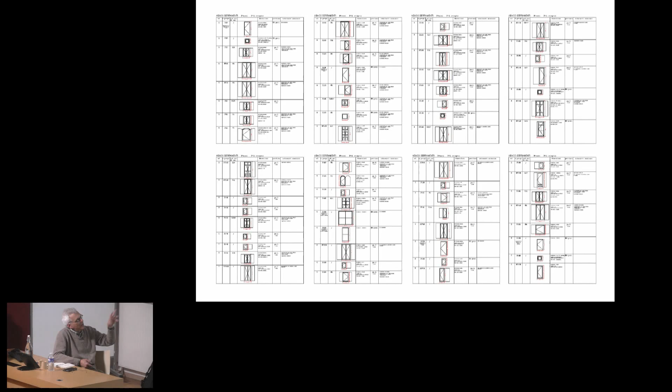This is a part of the catalog that we were collecting without having a proper structure of collection of materials. It was something we always did in a very wild way.

The other material that is in some way a discarded material, a leftover, is the straw — a secondary product, a byproduct of cereal growth, of the crop.

This is the moment of putting in place the structure of the straw bales. This is a section of how this building system is organized.

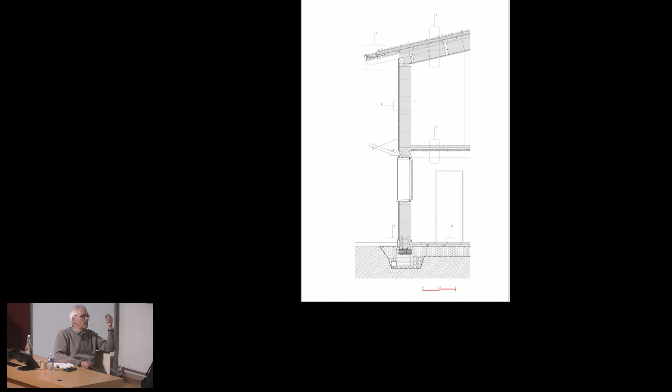In this case, for trying to save some money for the client, it was an experiment to leave the board, the plank of larch, as it was at the site. Normally you see this kind of oblique wooden planks in the rough phase of construction, and then there is a final layer of the facade. This inclination of the planks also has a structural purpose, because it's for bracing the prefabricated component.

Two of the buildings have an arrangement and section that comes straight from a thermal origin. This one is the house of the owners.

It's built with this hot nucleus, built in fireproof brick material, as a kind of central core. Then there is the external wall, made with timber structure and straw, and then the pitch of the roof, which is also treated with grass — you can see it here. This is the nucleus, the hot nucleus.

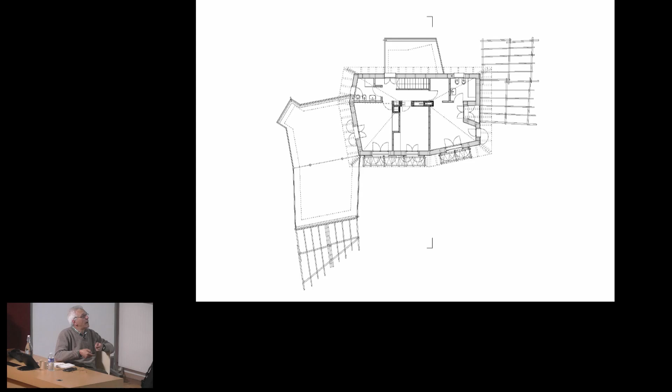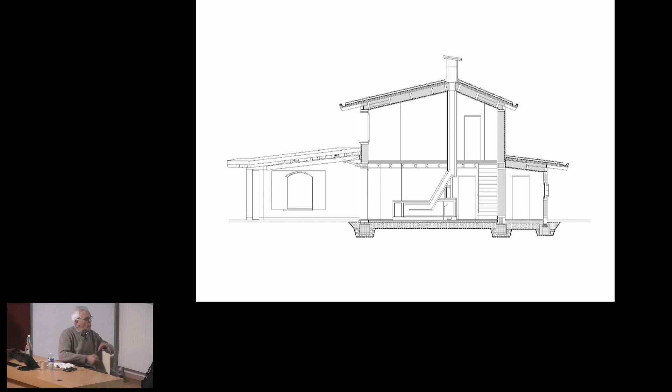In fact, there are actually two nuclei in this house, because there are two stoves with the recycling of the smoke, which goes and bends many times to keep all the hot part of the vapor of the smoke. The smoke goes out at the end almost cold, and all the warmth is given to the internal space.

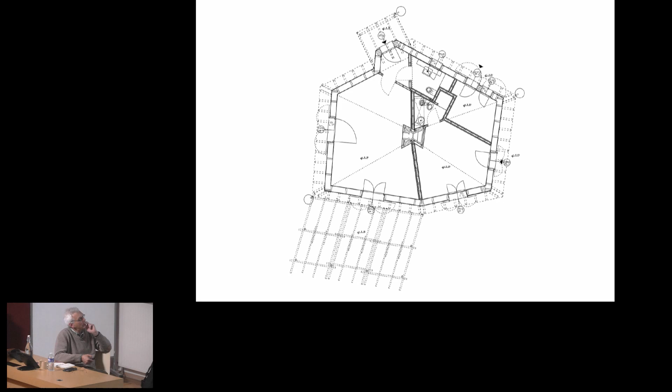This building, which is completely different, is the little building of the riding center, but it has the same thermal section: central hot core, external straw perimeter, and the roof. This is the plan with the core, and this is the section that you can see even more clearly.

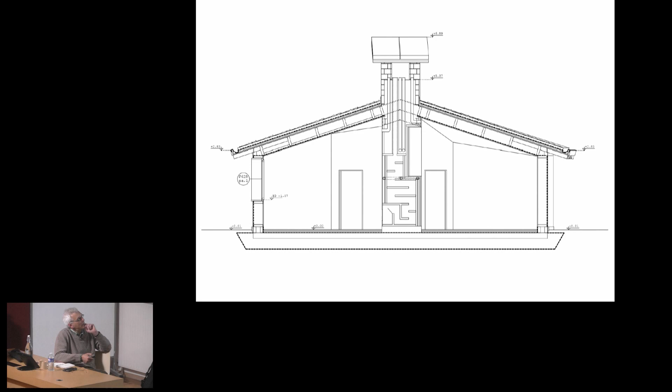In this case, there is also an interaction with the hot air and the solar water panel, so the hot air collaborates to warm the water in the solar panel.

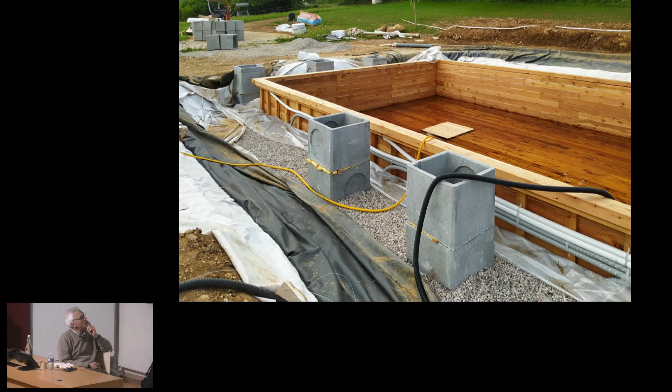And there is also this natural swimming pool that consists of a kind of large box made in larch wood, like a sunk boat that is completely underwater, and divides the part of the pool where people stay from the part that is regenerating the water through the plants.

Another project, much smaller, with some similar ingredients to the previous one, is also on another lake in the north of Italy, this time Lake Maggiore. This little house, made also in timber and straw bales, is actually a substitution for a very beautiful house that we initially tried to restore, but in the end it was too damaged and too expensive to keep.

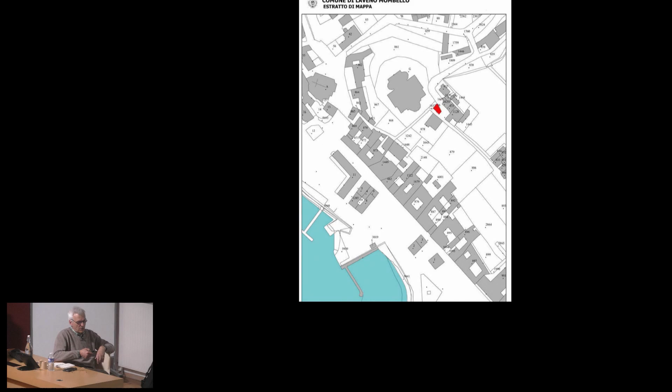This is the lake, in the middle of this village called Laveno on the east shore, raised up with a nice view of the lake. This was the old house.

This house was cut in two parts. One was completely squeezed and close to the existing villa, and the other was exposed to the sun and to the view of the lake. From this part, this is the beautiful view.

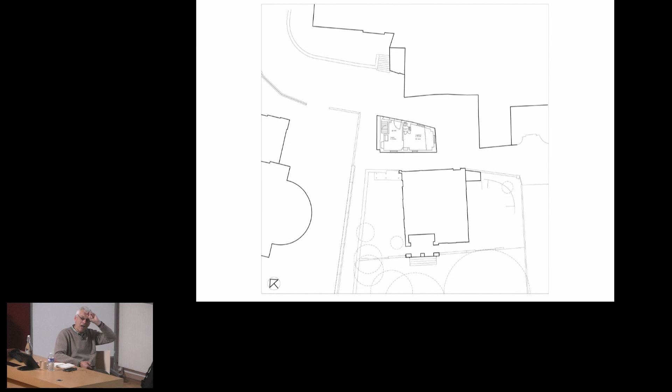The project had to obey a strange regulation that authorized building a new volume, but respecting absolutely strictly the dimensions and measures of the existing one. So this is the plan, inserted in this particular urban situation - it's like the little house was parked in the middle of a little square.

And this is the house, also with a large wood structure. This time the structure was left exposed at site and the facade was plastered, leaving the structure visible.

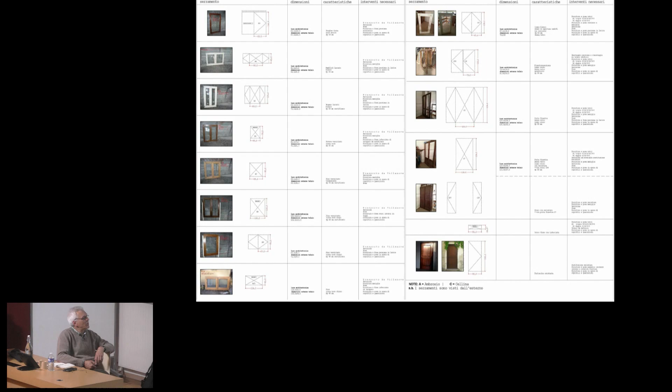Also here, this practice of collecting window frames around the north of Italy, and in this case, there is also the recovery of as much as we could - roof tiles from the old little building, steps, stone steps, parapets, and other pieces coming from outside, like this gate and others.

The original project wanted to reuse all these hexagonal tiles that were paving the first floor of the old house. So the project had this part with these tiles that we were using for protecting this side, which in the old house hadn't a jutting roof, so we had to rebuild it as it was, with this roof without any cantilevering elements.

So it wasn't protected, and for a building in straw bales, this could not be good. So we thought to reuse these tiles to protect this side, but it was rejected by local authorities. So we changed it a second time, again with the same tiles, but with another pattern that was copied from an existing house on the other side of the lake. That second time, it was approved.

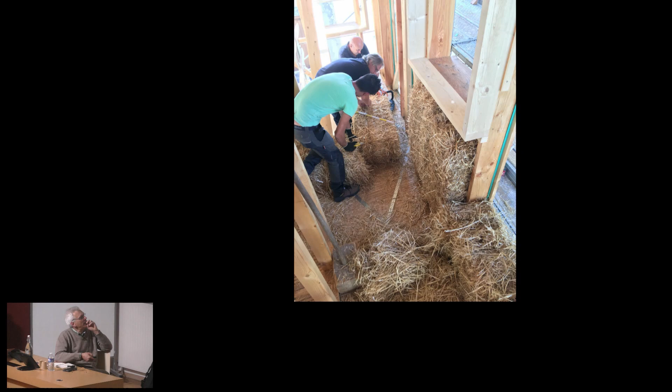The moment of teaching the constructors how to fill the structure with straw bales. The structure has been designed bespoke for the dimensions of the straw bales, of course.

The north side of the house, facing this micro square, and this section of the new house in some way reproduces this division in two parts.

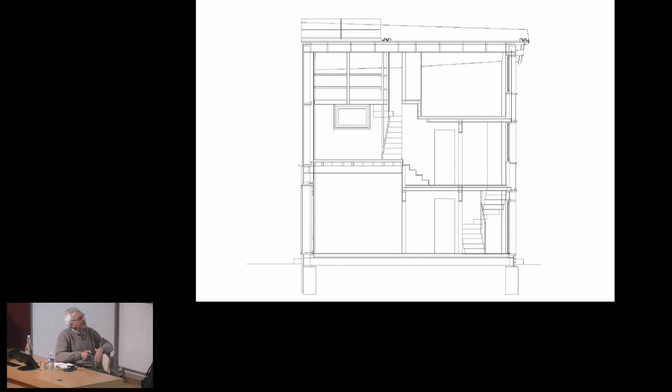The one that sees the lake and the sun, where there are the living spaces with the mezzanine here, and the other where there are the staircase and the two bathrooms that, by Italian regulation, can be shorter, so we could arrange another little room on top.

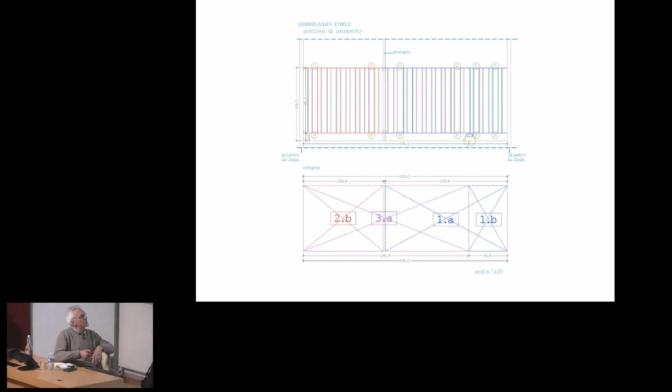The part of the house that looks at the lake reuses the parapets of the old house, and there is another trick here, because there was an objection that the old parapets were not guaranteeing the present regulation, that you don't have more than 10 centimeters between two elements. Since we had plenty of this parapet material, because the new balcony is shorter than the old one, we put the parapets in 2 layers to reduce the space between the vertical elements.

Unfortunately, at the end there was a kind of rebellion of the builder allied with the owners, and they didn't want to put on the hexagonal tiles. They said they were dispersed, they couldn't find any more of them in the warehouse of the builders.

So at the end, no hexagonal tiles. We were accustomed to having some figurative elements on the facades, so that was substituted by this kind of little graffiti that we made on tiles. These tiles also came from the warehouse of the builders, not clear from which other building, but we made some of this graffiti on some tiles, and they are almost invisible.

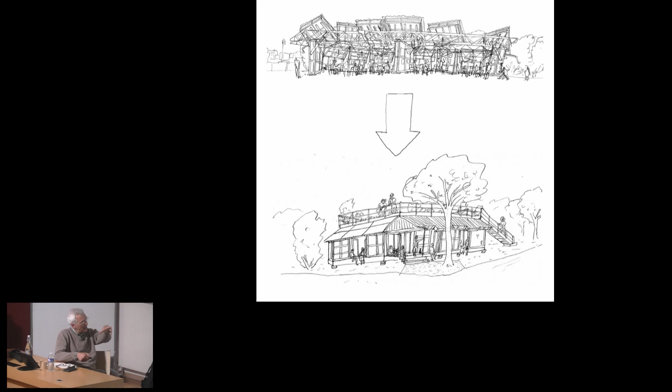Then we adapted the design of this final purpose into a mid-term solution for the pavilion for the exhibition, made again almost completely with the same family of crates. The only part prepared bespoke for the final version are these trusses.

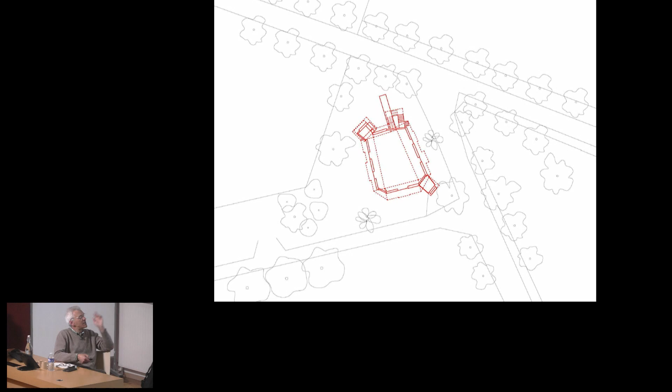This is the final pavilion, very simple, with a kind of open-air class on top. And this is the installation at the Triennale, where you see that the crates are used at the same time for both vertical structures and for part of the roof.

The structure was meant to provide some shade in a place where there isn't much shade, and some place to stay and rest, with a lot of benches. As the exhibition was in the hot season, together with the shade there were also many fans on the pitch of the roof.

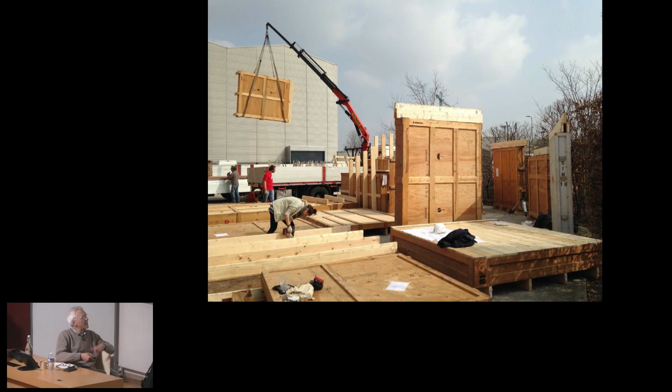The crates coming from Lake Maggiore, the preparation of all the elements, and the construction on site. This is the porch, where the crates have been consolidated with other elements to become bearing structural elements, but are empty. In the second version, they should be filled with straw and completed with membrane and other elements. As you see, the trusses here are used in a somewhat improper way.

And the pavilion has been used for different occasions, like presentation of books, or simply for people that stroll around this place. It's free, has a free entrance, and so is frequented by families and people until midnight.

The covering crates of the roof were coming from another dismantling in another work site in Piedmont that we were refurbishing, and is fiber cement without asbestos. There is also a little acrobatic collection of rainwater, not for collecting properly, but only for bringing it to a safe place without it going on the people visiting.

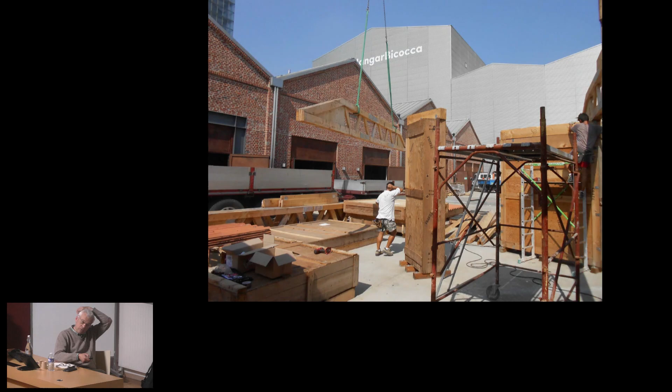The dismantling of this construction, and after a series of failures, this pavilion that I showed wasn't built. After some years, with the difficulty of keeping all the material stored in a place in Milan, the last occasion was to build a building here that should, at its time, recover and transform some existing building built without permission many years ago. This should be a place for association, but it was a building made for the municipality, so public property.

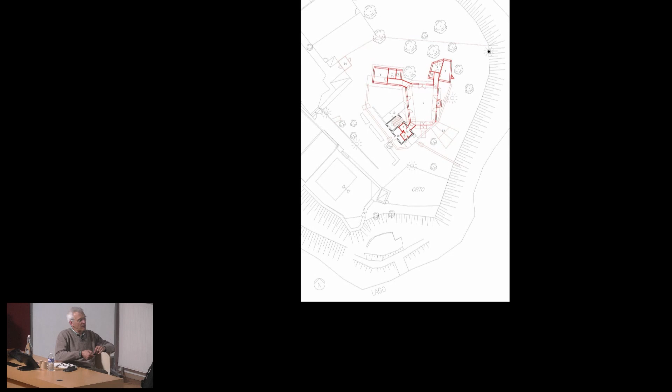And this is the main pavilion that was completely redesigned with the same materials. This is a piece that survived from the existing illegal construction, transformed into public bathrooms and a kitchen, and the other two constructions, like a kitchen and a little space for offices. This is the part that was kept of the existing building. And these are some sketches of the project.

It was put in a particularly beautiful place between two lakes in a park in Milan, where there were these caves for the digging of the gravel. This is how it is now and how it should be, with the two lakes visible from the top of this kind of terrace on top of the building, one and the other.

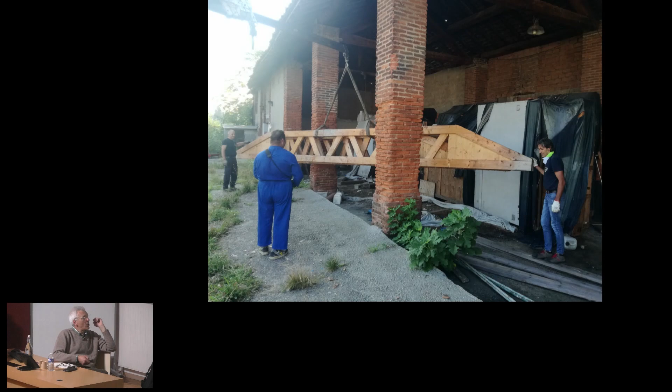This project has a sad story because the first time it passed through a very troublesome bureaucratic path, and there were 22 permissions to be collected. The main one, the office of the municipality that should then manage the building, their first statement was particularly enthusiastic, saying at the end that the project practices the famous circular economy and all this. So we moved all the materials from a farm south of Milan to the place where the building should be built, but then arrived an addendum to the same statement saying, perfect, we confirm the previous statement, so the project is approved, but with an addendum, which is simply that the building should be built only with new materials.

So, at the end, the materials have been there for 4 or 5 years, which was during COVID, and are rotting. The part that is surviving of the famous family of crates intersects in some way with this other project.

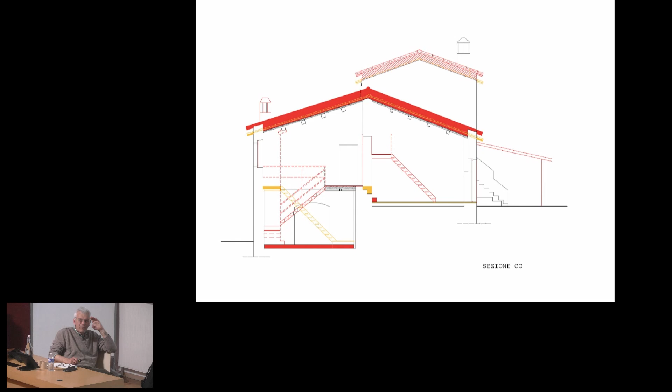That is a project about this casale, this rural house in the hills of Lazio, east of Rome, and is a complex of buildings that was in this condition 3 years ago. Very beautiful, and the operation that was needed consisted mainly in two categories. One was to insulate the roof that was already insulated with 10 centimeters of polystyrene, a very horrible material, very used in the building market, but very bad for insulation against hot climate.

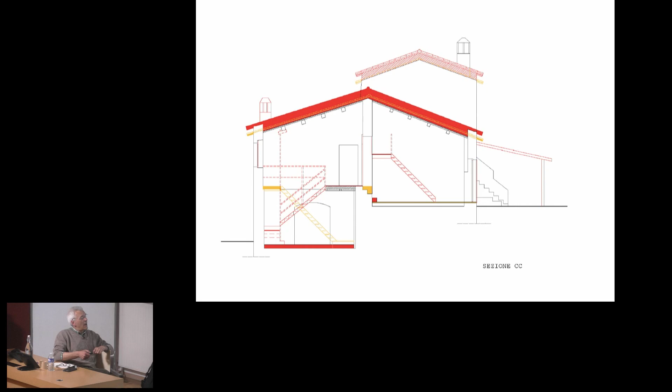So the project was to take off the polystyrene from the roof and use it for the contact with the floor, with the ground. This one operation produced this, and was also the occasion for consolidating, doing the anti-seismic implementation of the existing structure. So this is the new insulation in straw bale and the new beams that work together with the existing beams underneath.

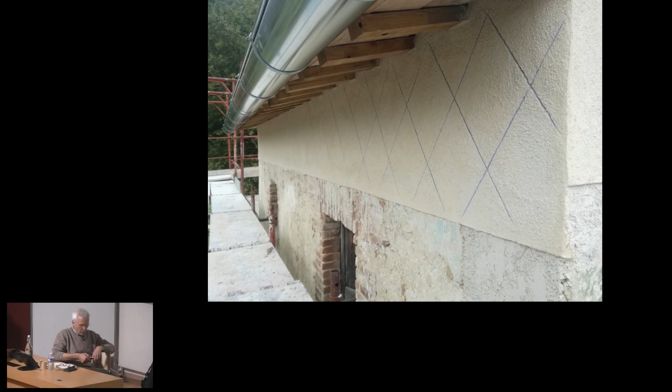And this operation produced a series of stripes in plaster that were more or less the parts that were damaged of the old plaster, or the parts that were produced by this elevation of the thickness of the roof, of the insulation. And so there is this try to embellish this new part of plaster, of lime plaster, with some graffiti that also here are almost invisible.

For example, there are graffiti here and here. Perhaps you see some circles here, but you must wait the right moment of the day to see them for some short time. For example, this kind of net pattern, or this other one.

And the second operation that was needed there was simply the construction of internal walls, because the house was probably left during a try of refurbishment many years before, in which they demolished any internal wall.

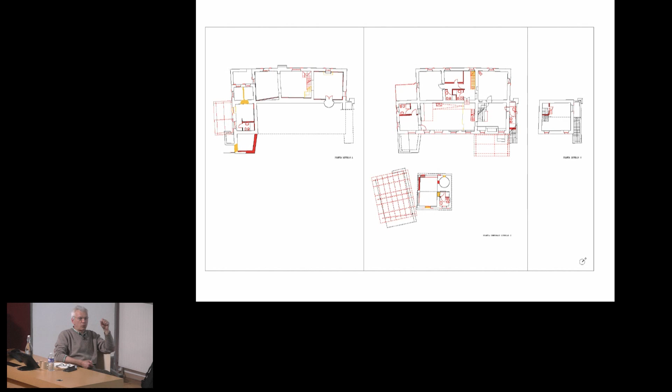So it's here that the leftovers of the family of crates come back again to us, because we needed to empty this last garage where they were stored. And so we proposed to these friends, the owners of these houses, to use all these elements to do the internal walls, doing a kind of series of collage. You see here all the walls that were produced by these given elements.

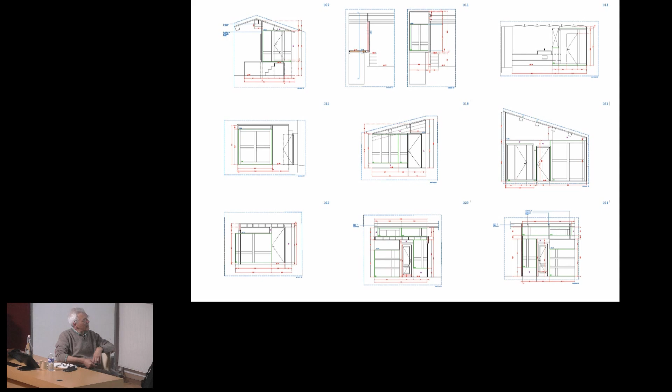The elements were filled with wood fiber and with a membrane, and are mainly, at the end, toilets. This is the internal side of the toilets. This is another one. This is another one built, suspended, but built on top of this existing parapet of this existing staircase.

And this is a system of walls that creates two bathrooms, a mezzanine, and a small room, a corridor.

And with the leftovers of the leftovers of the leftovers, of course I'm referring to these frames that were inside the crates to brace the canvas of the artworks.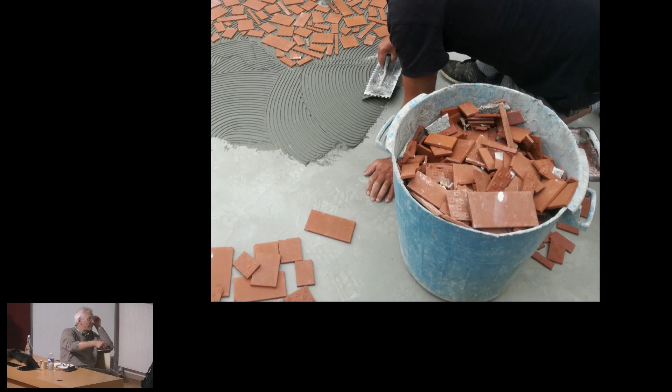Other salvaged things are leftovers - this flooring of the terraces is made with the leftovers of the internal floors, very rough tiles that have been used for doing these terraces. This was the structure part of this group of houses, a shed that was demolished by the constructor the first day.

So we did an exercise of reconstruction with the same elements for rebuilding a shed for the photovoltaic panels, where the old elements have been coupled for getting the resistance that was needed by the engineer.

The last two things I want to show you - this is not a project of ours, but made by my students in Mendrisio. I teach at the Academy of Architecture in Mendrisio in Switzerland. This is the work we made in the last two semesters, last year and the previous year.

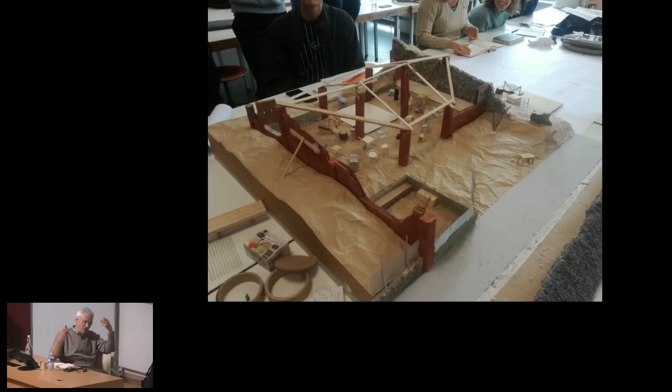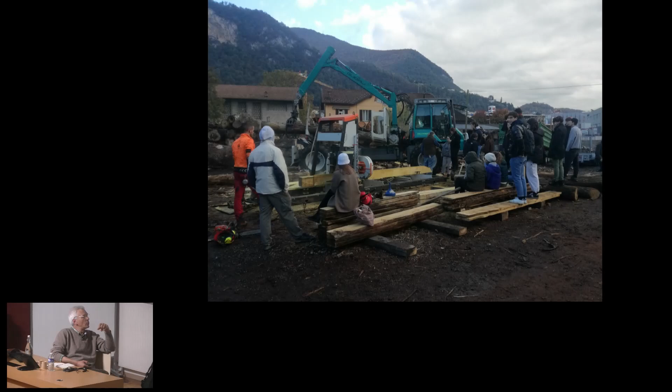The difficulty was doing the master plan, the general project all together in 2025, but this was the first semester. The idea was to construct this big tent, like a circus one, with many structural elements cut from local wood coming from the management of the forests.

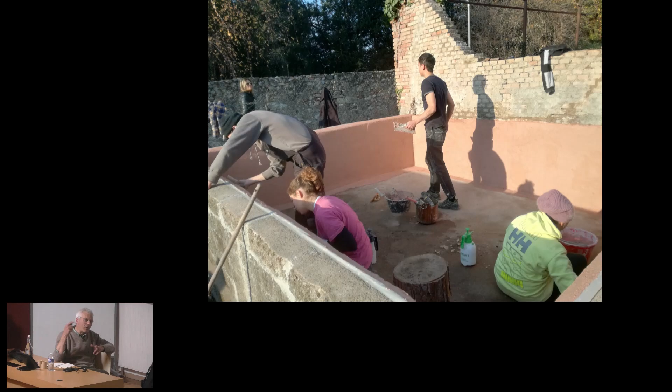Discarded sails from the lake near Lake Como, discarded materials and leftovers from marble cellars, and fragments of roof tiles - the old roof tiles that were there from the rural use - we have broken all the fragments into a very fine powder mixed with the grassello of lime.

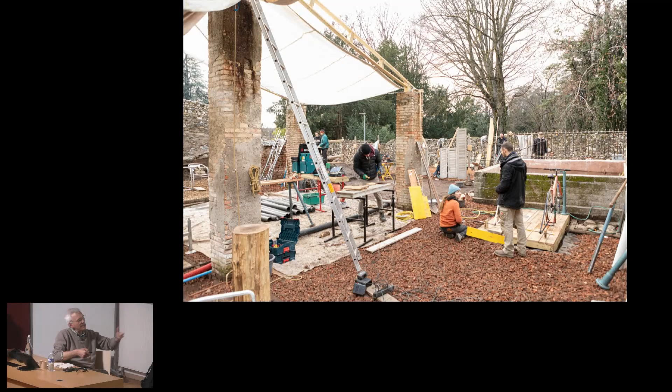We produced this coccio pesto, a very ancient technique for waterproofing tanks and cisterns and things like that. This is a collecting pool for the rainwater coming on top of the covering.

This is the work we did the first year, but it was very frail, very fragile in realization. The weather was very strong. Also the kind of people that used to stay in this place - there was a lot of vandalism. So at the end, after one year, it was in this condition.

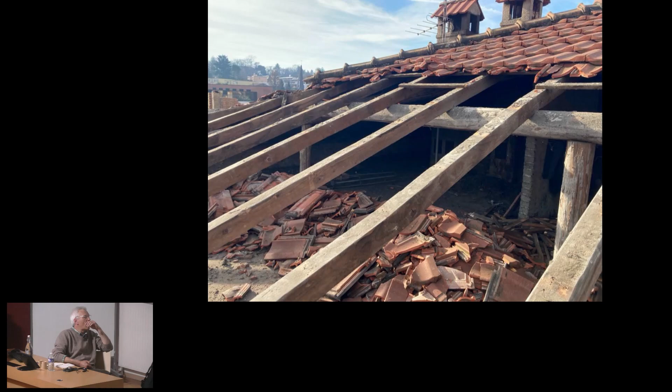So our work the next year was to redo almost everything, but mainly the roof, the cover. And the materials came from a demolition that was a few hundred meters away.

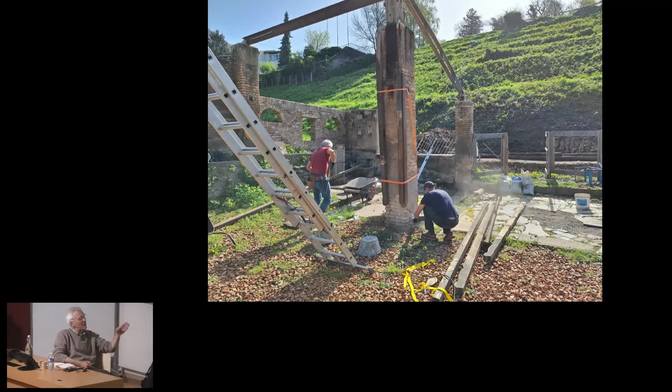This is an operation of putting straight these pillars that were squint, that were leaning by 30 centimeters. So we cut them at the base, the pillars, we pushed with ropes and props, and we inserted some special concrete with controlled shrinkage.

This is one of our main suppliers, the local dump. Part of the roof, the group decided to do in palustrine reeds, so we went to cut these reeds on the hills.

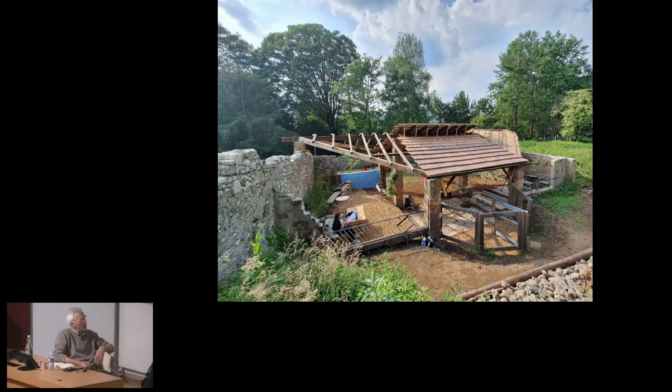The coccio pesto was refreshed, and this is the result of the second semester. The roof tiles were bought for 50 francs on the internet, obviously second-hand.

Many of the things you see are things already built in the first edition but repaired and transformed. This is the part made in reeds, and this is the thing that students painted on the internal side of the tiles.

And these are the implementations of the structure we needed. Passing from the first solution to the second solution was a good exercise to calculate with the engineers what these elements needed to have added for bearing the new load.

And the rest of the tiles was grinded to become a kind of gravel, a cotto gravel. And this is chipped wood.

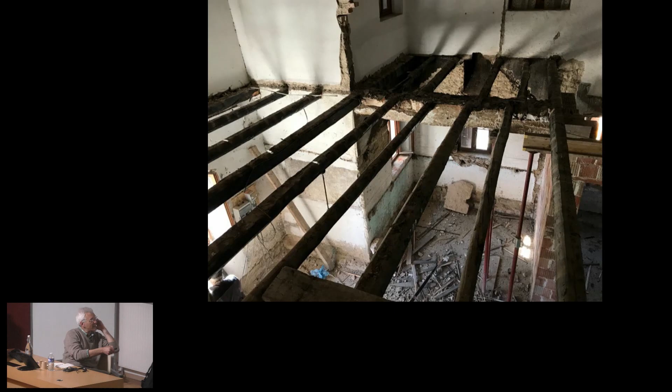We did the project together with the Venetian Association of Young People doing vegetable gardens and social orchards and things. They worked here for 6 months doing the vegetable gardening and an activity of exchange with the school, selling the produce on a market in the sestiere in Venice.

And we did the scheme of the whole project, and we built on the place some structures: a big pergola with a serra, a greenhouse, a chicken hutch, another pergola, another little pavilion with an altana, a terrace. And we discovered afterward that this shape had the shape of a fish.

And you know that the fish is a very ancient symbol in ancient Christianism, but it's also famously the shape of Venice itself, which is always said to resemble the shape of a fish. And this shape was a fish, but was also a kind of almond, like these mystical almonds that are often found in many...

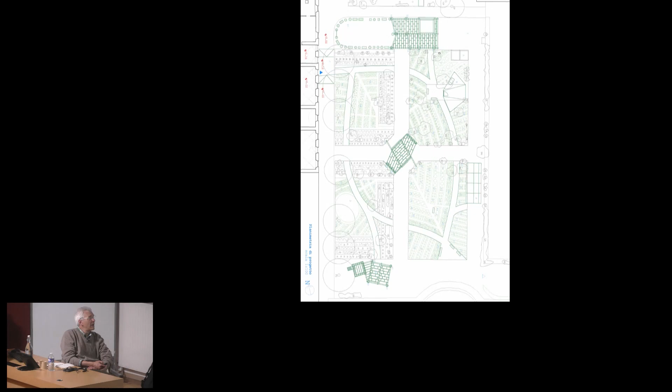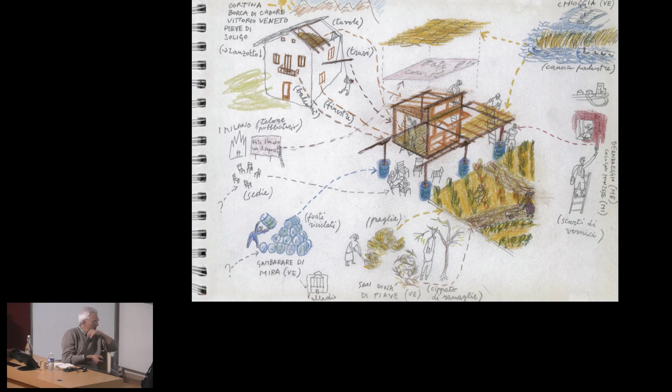...Romanic churches or paintings. So this is a drawing explaining where the pieces, where the components, were coming from - pieces from all around Veneto, the region of Venice, from demolitions, some reeds from the lagoon, some other materials from the rural parts of the internal land of Venice, like straw and cut branches for kind of soft paving the path.

Other industrial junk, like tanks, for doing the foundation of the provisional structures. These are some of the places that were in demolition the weeks before the start of our construction, and the various elements - the usual abacus of all the elements that you need if you build with salvaged materials.

This is the last of the figures that compose the installation by Alvaro Siza - the 11 human figures in wood inside, and the final one in Carrara marble outside, accompanying the visitors into the vegetable garden.

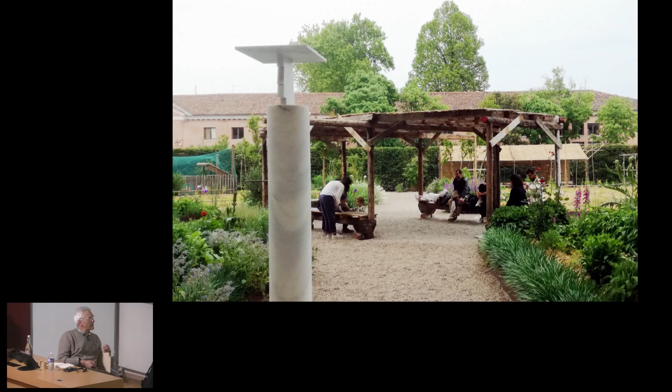And this is the central pergola, a view from the first floor with a very young plantation of vegetation. The ones you see already tall are the perennials that were already existing. The ones we planted grew during the running of the Biennale.

The big pergola with a kind of little pavilion was also a place where the group of Venetian growers worked with the children of the schools, with the seeds, and also a little bar on the occasion of special events. The chicken house - the chickens were already living there in another kind of house.

The other pergolas, the old structure of the chicken house that was converted into a new pergola, the little micro space for the personal there with a little altana on top. There is also a Byzantine shape window taken from the Stones of Venice of Ruskin, that was painted. These are the unpredictable effects of the leftovers, planks put on top of beams, and where there were the beams, there is not the white painting.